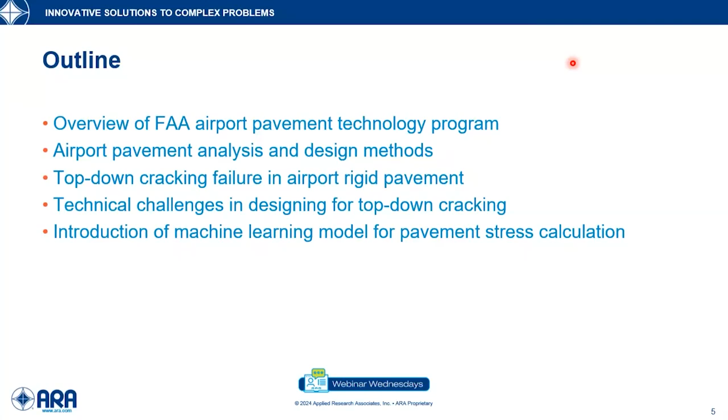Again, I'm Ali Ashtiani, and I'm excited to share insight on key advancements and challenges in airport pavement analysis and design. This webinar provides a quick overview of the FAA Airport Pavement Technology Program. Then it will explore airport pavement analysis and design methods with the focus on top-down cracking failure in airport rigid pavements. It will then discuss technical challenges in designing pavement for top-down cracking, and finally introduce a machine learning model for rapid estimation of pavement stresses.

So starting with the overview of the airport pavement R&D, since 1999, FAA has conducted state-of-the-art research on airport pavements at the William J. Hughes Technical Center in Atlantic City, New Jersey. National Airport Pavement Test Facility, NAPTF, is a full-scale pavement test facility within the FAA Tech Center that provides high quality, accelerated test data from pavements subjected to simulated aircraft traffic.

Since 1999, 9 construction cycles have been built and tested that includes both rigid and flexible pavements. In September 2015, FAA expanded its full-scale accelerated testing capabilities with the addition of National Airport Pavement and Materials Research Center, NAPMRC, with a focus on pavement material performance. We at ARA have provided pavement consulting support to the FAA since 2015.

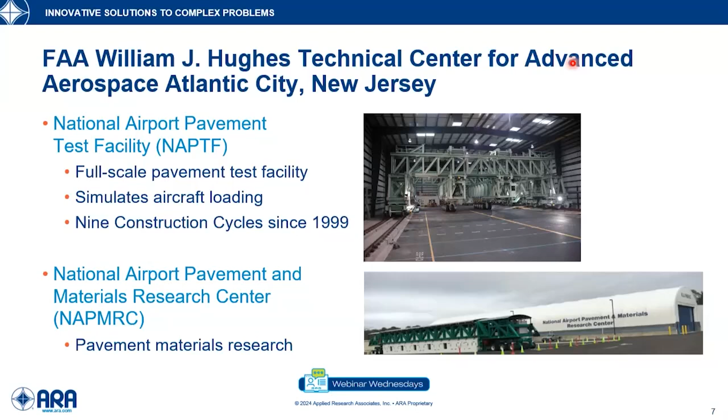The FAA Airport Pavement R&D program conducts research in areas of pavement design, pavement materials, and pavement evaluation, with the goals of designing safe, durable, economical, and environmentally friendly pavements. The products of this research are sets of specifications in FAA advisory circulars, specifications for material characterization, and a series of software packages for pavement design, evaluation, or management.

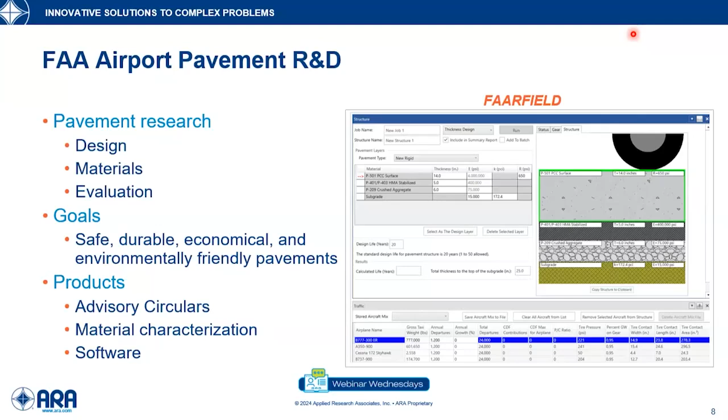So as an example, FAARFIELD is the FAA pavement design program where we have played a key role in its development, enhancement, and upgrades. So how does the airport pavement design work? Pavement design is based on a mechanistic empirical concept as shown in the diagram below.

It usually starts with defining a performance or failure criteria, which in our example, the airport rigid pavement, the failure criteria are typically bottom-up cracking and top-down cracking. So the procedure then uses a pavement mechanistic response model to calculate critical stresses associated with each of the failure criteria for a given pavement structure and an aircraft mix.

The calculated stress gets sent to a failure model that relates the repetition of that calculated stress to failure. The failure criteria are defined based on pavement distress quantity. So this part is the empirical aspect of the design procedure, and FAA uses data from NAPTF full-scale tests to establish the failure models.

Next step is to calculate the damage index, which is defined as the actual repetition of the aircraft to the repetition of failure. Then the damage is calculated across the pavement and for all the aircraft using a cumulative damage factor, or CDF, procedure. If this condition of the CDF is satisfied, the design is complete.

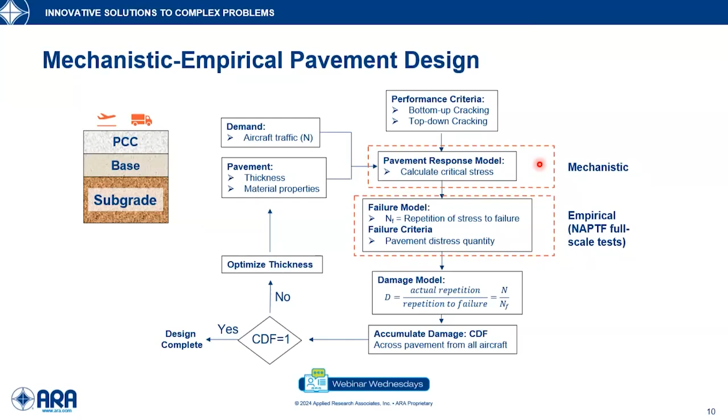The mechanistic models used in rigid pavement design programs typically include models based on layered elastic theory. These models are fast, but not too accurate for rigid pavements. The other method is closed form solutions like Westergaard's method. This is again fast, but it can accommodate very limited loading scenarios.

The gold standard method for calculating stress is finite element, which is the most accurate, but it's computationally intensive, so direct use is typically not practical for pavement design. The alternative is machine learning models, which have gained popularity in recent years. They're basically surrogate models trained based on finite elements, typically fast and with comparable accuracy to finite element methods.

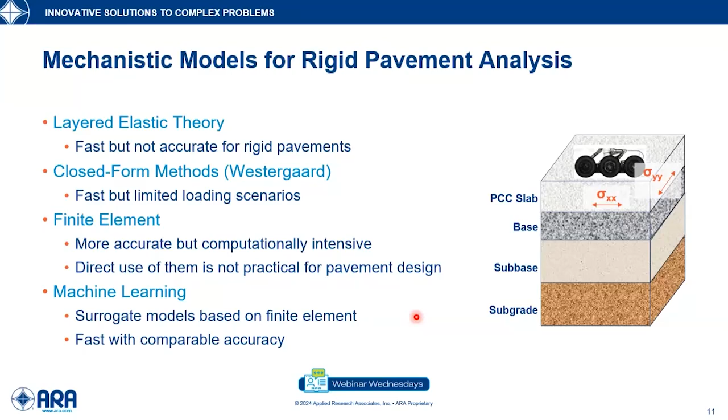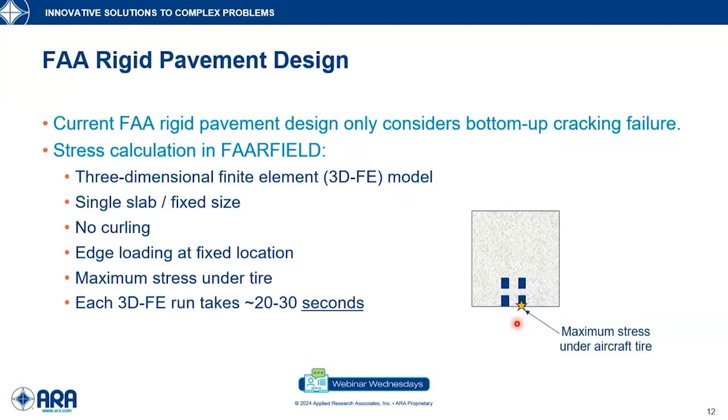The current FAA rigid pavement design only considers bottom-up cracking failure. The stress calculation in the FAARFIELD program is based on a three-dimensional finite element model. FAARFIELD uses a quite simple model: a single slab with a fixed size, not considering any thermal curling. The aircraft load is applied at the edges of the slab, at a fixed location, and the program calculates the maximum stress under the tires. Each run of the 3D finite element takes around 20 to 30 seconds.

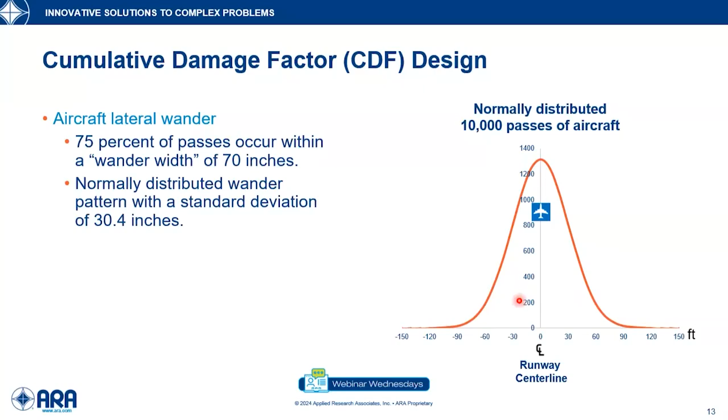As discussed earlier, pavement design uses the concept of cumulative damage factor, or CDF. A key aspect of CDF design is to account for aircraft lateral wander. Unlike highways where traffic is mostly channelized, aircraft rarely travel in a straight path along the pavement section in runways and taxiways. Instead, their movement includes lateral deviations known as aircraft wander. FAA accounts for this by assuming aircraft wander follows a normal distribution with a standard deviation of 30.4 inches. For example, if you have 10,000 passes of aircraft in your design mix, FAARFIELD distributes the passes across the pavement width, or runway width, using the graph shown here.

The CDF procedure for bottom-up cracking first calculates the stress for each aircraft, then feeds the stresses to a failure model to calculate number of passes to failure, or NF. It then normally distributes aircraft passes across the pavement, calculates the CDF term for all aircraft and across all lateral offsets, and combines all the CDF from all aircraft, as shown in this example.

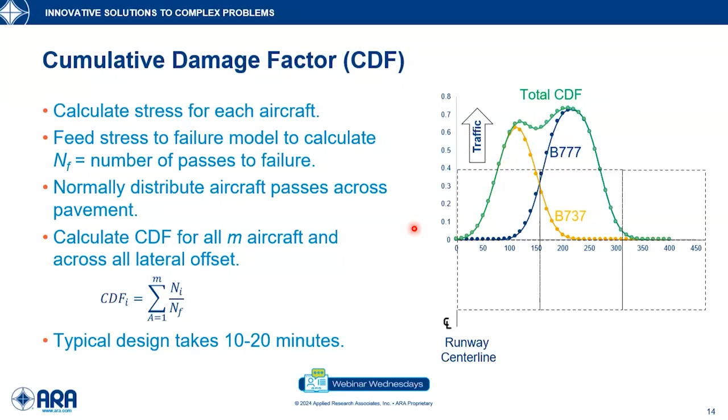A typical design process takes around 10 to 20 minutes, depending on the number of aircraft in the mix and the pavement layers.

FAA has a goal to add top-down cracking failure to the FAARFIELD program and to the rigid pavement design process too. Top-down cracking is caused by high tensile stresses on top of the slab and is likely to govern the failure when an upward curled slab is loaded with a gear load near its edges. Top-down cracking typically manifests as corner cracking or transverse longitudinal cracking.

So how does top-down differ from bottom-up cracking? These two stress contour maps try to explain how they are different. Assume a pavement layer system with jointed slabs, subjected to a negative temperature gradient, meaning they're curved upward, and loaded with an aircraft gear near one of the corners. Unlike bottom-up cracking, where the maximum bottom stress occurs just below the tire footprint, the maximum top stress occurs far outside the tire footprint, as shown in this dark red area.

The critical top stress can be critical in both directions, looking at the stress, the Y and X components can both be critical. The next difference is that the magnitude and location of the maximum top stress highly depends on the location of the applied gear with respect to the edges. As you move the gear toward the center of the slab, the chance of top-down cracking becomes minimal. But if you load near the edges or corners, there's a high chance of top-down cracking.

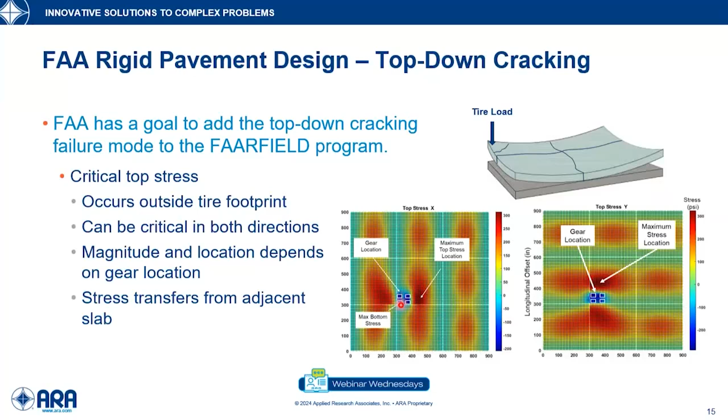Finally, the top stress can transfer from one loaded slab to an unloaded slab. Given all these characteristics of top-down cracking, the mechanistic modeling requires the inclusion of thermal curling and the use of a multiple slab system, as opposed to the single slab system used for bottom-up cracking. This multiple slab system accommodates the full landing gear, which is critical in top-down cracking, accommodates aircraft lateral movement, and considers load transfer between adjacent slabs.

A 3D finite element run for these complex slab configurations can take up to 30 minutes, almost 50 to 60 times higher than the typical run for bottom-up cracking.

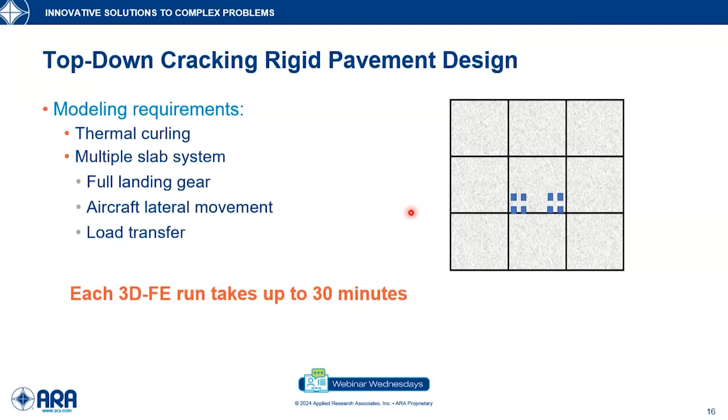For top-down cracking design, the existing CDF for bottom-up cracking cannot be directly used. The CDF for top-down cracking requires calculating the critical stress for each point of the slab, for every landing gear position, and for each aircraft. The stress must be calculated in both directions, transverse and longitudinal. This implies that the new procedure must provide more than just a single largest stress in the slab.

It must provide the stress distribution across the slab for any lateral position of the aircraft, as shown in this example. This is the pavement system loaded with this gear at this corner. We are looking to calculate the stress distribution along these pavement edges to be able to accurately calculate the CDF. So what's the challenge here?

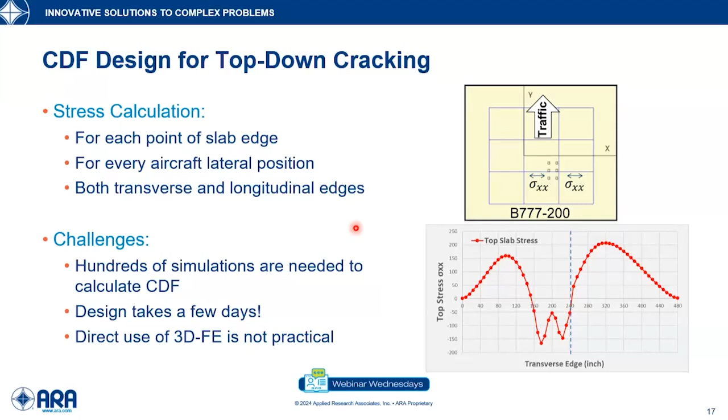To complete a CDF procedure for top-down cracking, we need to perform hundreds of finite element simulations. The design can take a few days for a single design. This indicates that the direct use of 3D finite element analysis is not practical for top-down cracking design.

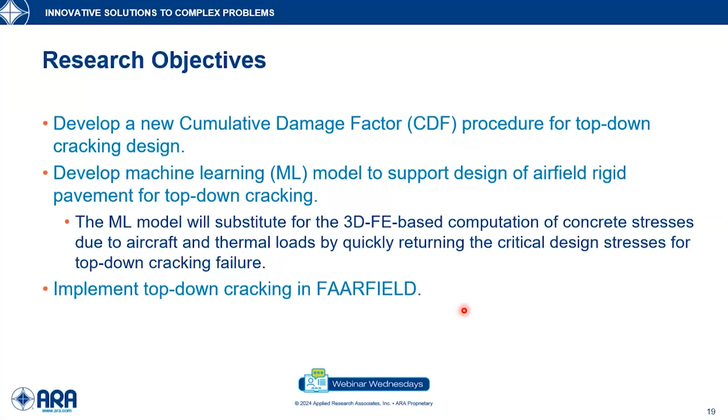To address these limitations, FAA initiated research with the objective first to develop a CDF procedure for top-down cracking, then to develop a machine learning model that can support the design of top-down cracking. The machine learning model will substitute the 3D finite element analysis for computation of critical stresses. Finally, the goal is to implement top-down cracking in the FAARFIELD program.

Based on these requirements, we developed a machine learning model that takes input parameters and estimates the stress distribution along the slab edges for a pass of the aircraft.

Our model consists of a total of 19 parameters, which include the pavement properties, including layer modulus and thickness, joint spacing and joint stiffness, thermal loads including temperature gradients and coefficient of thermal expansion, and the gear configuration, which includes gear type, gear weight, tire pressure, dual spacing, tandem spacing, and track spacing.

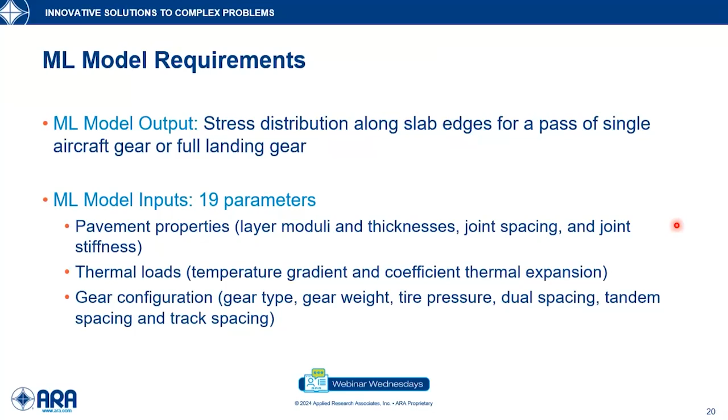For these models, we consider three pavement systems. The first is the 4-layer pavement system typically used in large and medium hub airports, consisting of a PCC slab on top of a stabilized base, sub-base, and subgrade. These pavements can serve heavy aircraft with gross weight greater than 100,000 pounds, with gear types including dual tandem and dual tridem gears.

The second pavement system is a 3-layer system typically used as a rehabilitation alternative in large hub commercial service airports, basically by eliminating the stabilized base and using a thicker PCC slab. This pavement system can serve heavy aircraft like the 4-layer system.

Finally, the third pavement system is a 3-layer system with a thinner pavement, used in general aviation airports. This pavement can serve lighter aircraft with gross weight less than 120,000 pounds, with aircraft gear that is single or dual.

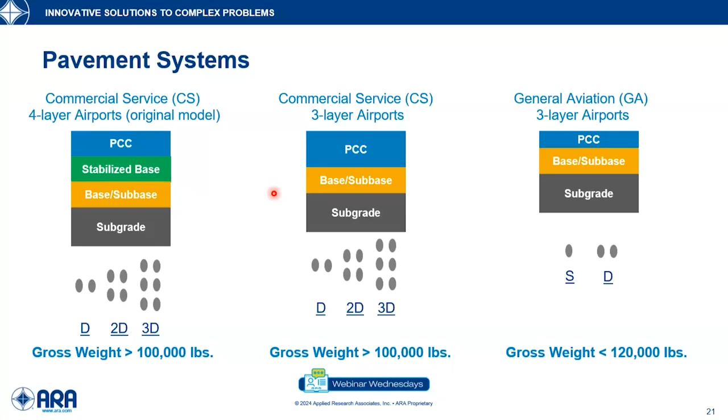To train the machine learning model, we developed a comprehensive database by performing 3D finite element simulations using the FAA rigid pavement design program, FAARFIELD. We used distinct combinations of pavement and aircraft inputs to calculate the resulting stress distribution, sigma xx and sigma yy, along the edges of the design slab, which is the center slab in a 3x3 slab system. We used 5-inch elements for all cases to ensure the accuracy of the model.

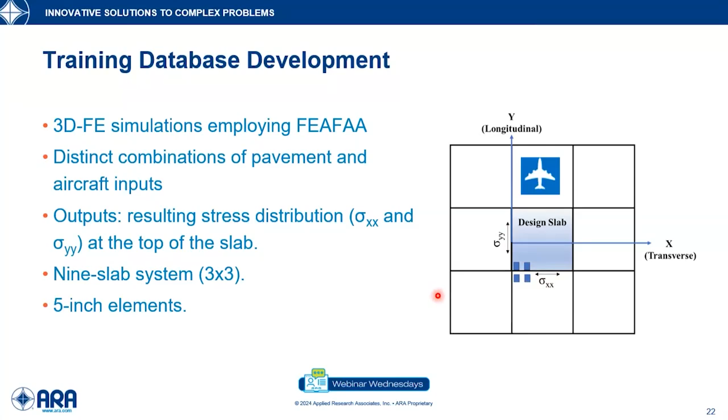We used a Monte Carlo simulation that randomly chose input values from predefined ranges with a uniform probability distribution for each simulation. In total, we created 127,000 records for the 4-layer system, 125,000 cases for the 3-layer commercial service airports, and 125,000 cases for the 3-layer general aviation airports.

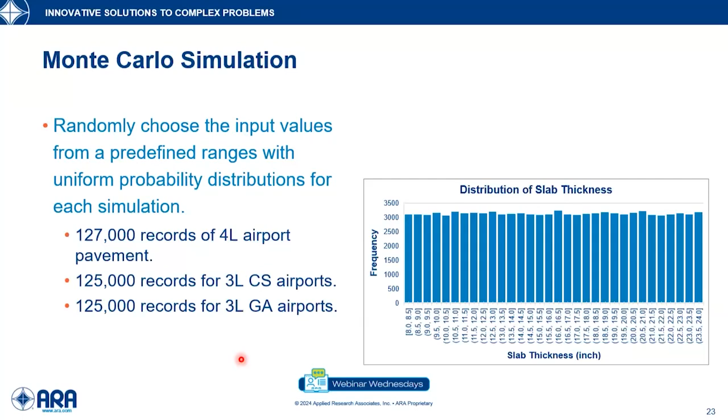For each input parameter, we defined a range of minimum and maximum based on FAA standard material properties and the FAARFIELD material library. We used that as a benchmark, then extended those limits to include a wider range of pavement cases.

For example, FAARFIELD uses a fixed PCC modulus of 4 million PSI for design, but we considered PCC modulus ranging from 3.5 million to 6 million PSI to account for high strength concrete. For the temperature gradient, we used a range between -3 and 0, assuming that positive temperature gradient had no effect on top-down cracking.

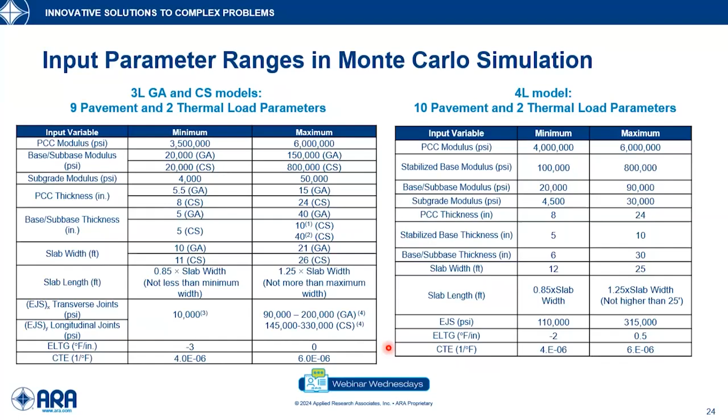We used 4 parameters to encode a single aircraft gear, which includes the gear weight, tire pressure, dual spacing, and tandem spacing. For each parameter, we define a min and max based on the FAARFIELD aircraft library, and we expanded those limits to accommodate any gear configuration, including any that come in the future.

The gear parameters are independently selected in the Monte Carlo simulation, so they do not necessarily represent a real aircraft. This approach increased the robustness and generalization of the model, and basically eliminates the need for retraining the model every time a new aircraft gear configuration releases. So our model is not aircraft specific, but instead a general model that can handle any gear configuration.

The single gear case was used to calculate the stress distribution along the x-axis and y in transverse and longitudinal direction.

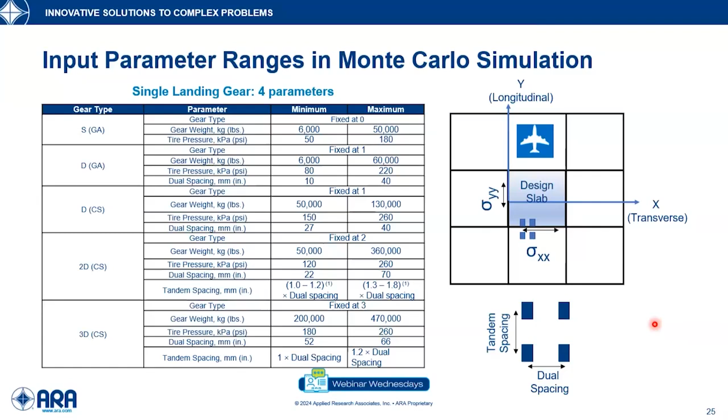We also considered the full landing gear cases, like 2 belly gears of Airbus A380 or 2 belly gears of Boeing 747, because the full landing gear, if applied at the same slab, can significantly increase the chance of top-down cracking. So we wanted to make sure that we account for that.

We have one additional parameter for the full landing gear, which is the track spacing, the spacing between the two gears. These full landing gears were used to calculate the stresses in the X direction only, and the single gear was used for the stress in the Y direction, because the full landing gear has no real effect on the stress in Y direction. Its effect is mostly on the X direction stress.

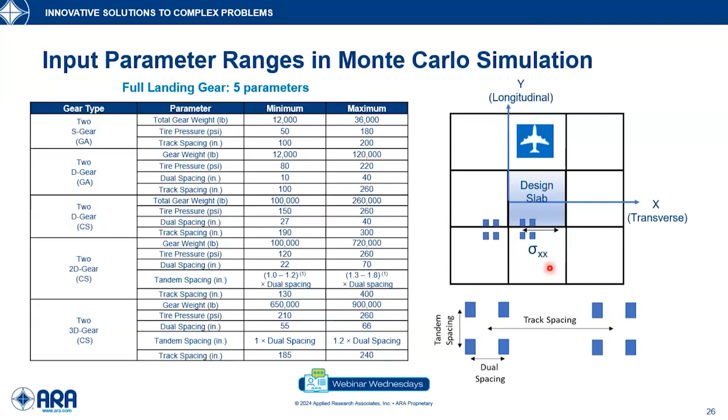Another parameter that we considered in our model was the aircraft lateral position, or gear lateral position, which we show has a significant effect on the magnitude of the stresses for top-down cracking.

The gear can vary from the third of the adjacent slab to the middle of the design slab. This is for the single gear, and for the full landing gear, the gear can vary from here to there, and this location was randomly selected in our Monte Carlo simulation.

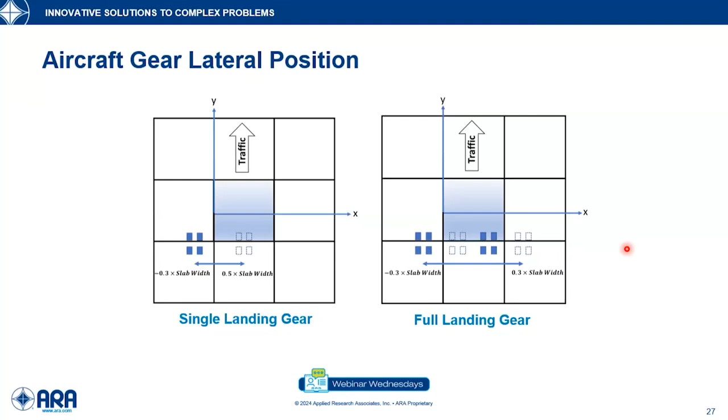Another aspect we considered was how the stress state on pavement changes as a result of aircraft rolling along the pavement. So do we need to simulate aircraft longitudinal movement like we did for the lateral movement? The answer is no. An analysis showed that the maximum top stress in the slab occurred when an aircraft actually enters the slab, as shown in these locations.

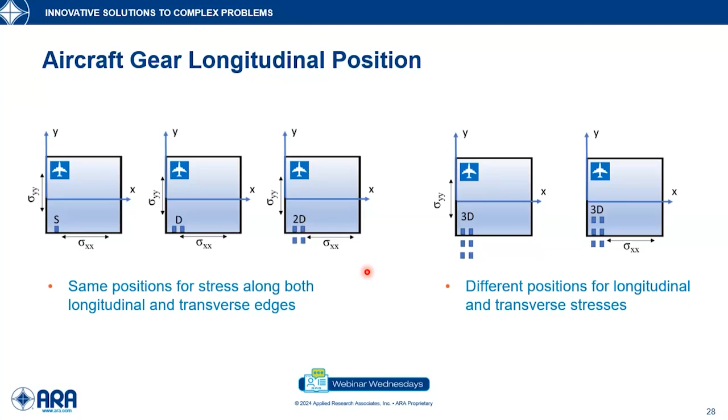When the aircraft enters the slab, it causes the maximum top stress, so we don't need to really model the whole aircraft movement along the pavement. The aircraft longitudinal position was not considered as an input variable in the machine learning model. Instead, their locations were fixed as shown here in these positions in the finite element simulations.

Using the developed database, we trained a machine learning model that can estimate the stress distribution along the slab for any gear configuration, for the predefined ranges of the input parameters. The model is a modular deep neural network, a deep artificial neural network.

As I said, we had different pavement systems, and we determined that the underlying physics from the 3-layer and 4-layer systems are all the same. So we decided to combine the database from the 4-layer and 3-layer systems to create a comprehensive database and developed a general pavement stress distribution model by leveraging transfer learning.

The machine learning model has two major modules: one is the input encoding, and the other is the pavement stress distribution prediction module. The input encoding takes all the input parameters, like pavement and gear parameters, and processes them into latent features, which are the compressed form of data. The latent feature gets sent to the pavement stress distribution prediction model to predict the stresses.

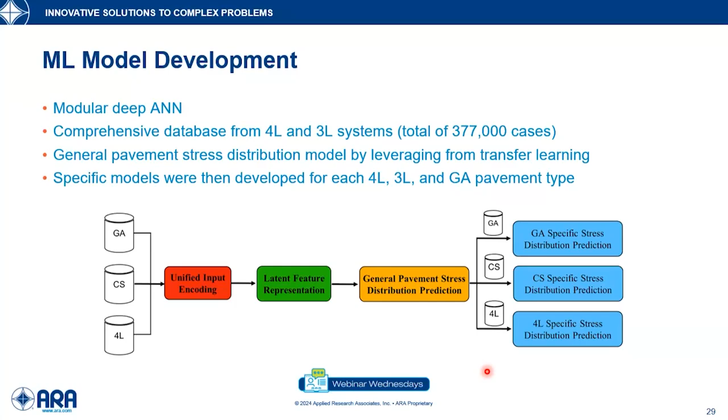We first developed the general pavement stress distribution model, and from that we developed specific models for each of the 4-layer, 3-layer, and general aviation airports.

This diagram shows the architecture of the input encoding module, which has a single architecture with a shared interface that can handle all gear types.

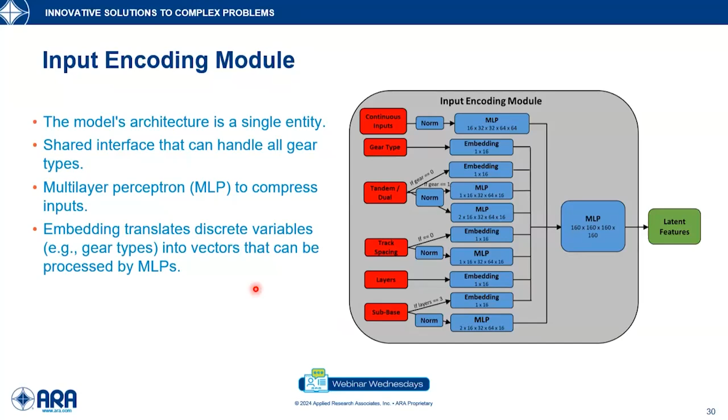We used multi-layer perceptron to process the continuous input variables like the pavement thickness and modulus, and we used embedding to translate the discrete variables like the gear type into vectors that can be processed by the MLPs. The output of this input encoding module is the latent features.

The stress prediction modules take the latent features as input and estimate the stress in X and Y direction in two separate paths.

For the stress prediction, we initially used conventional deep learning regression models for discrete prediction, where the predictions are made over a domain with a fixed number of outputs. We use a kernel function to approximate the shape of the stress distribution.

However, since the output of the training cases were not the same size, because we had different slab sizes in the finite element database, we had to interpolate the nodal stresses to a fixed number of points. This was a constraint that significantly reduced the accuracy of our model.

So instead, we developed a novel ANN model that predicts a dynamic functional for continuous waveform prediction. In this approach, there's no need for the model to specify a fixed range over the prediction domain. The displacement in this figure is an abstract distance value across the stress waveform, which has a dynamic size.

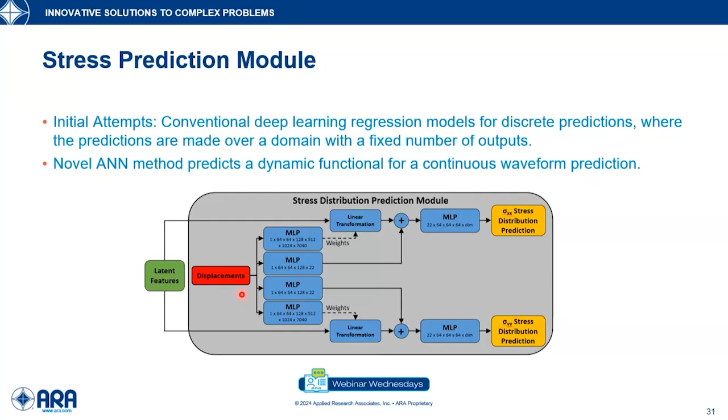For model training, we used backpropagation and an adaptive Hessian numerical optimization algorithm, which is a fast second-order stochastic optimization algorithm designed for machine learning. We used multi-task learning of the cost function, which the model tries to minimize during training, with two objectives: one, to minimize the error near the peak stress area, which is critical for pavement design; and second, to minimize the mean square error of the entire stress distribution waveform, to encourage the model to learn a more generalized representation of the underlying physics.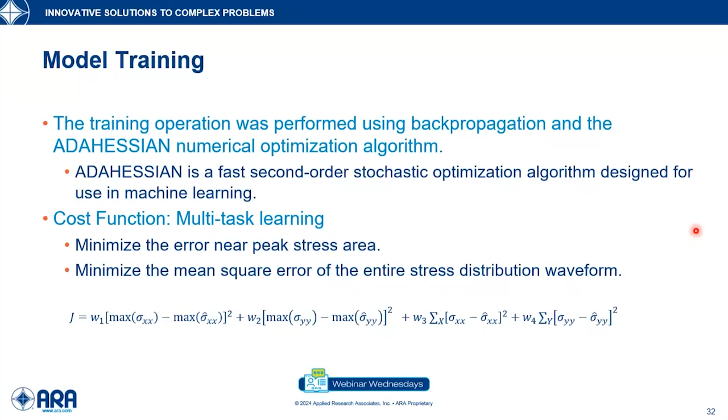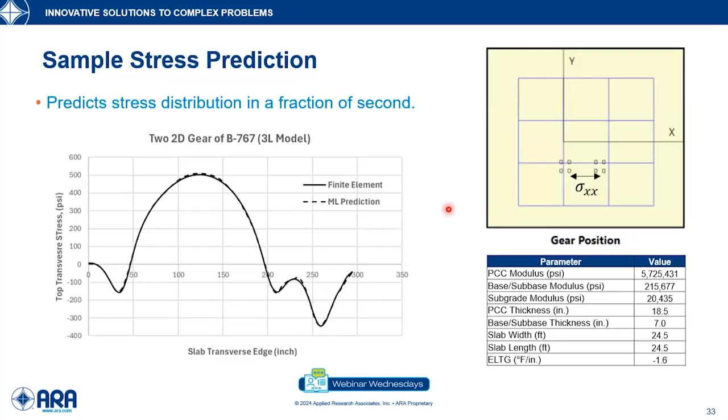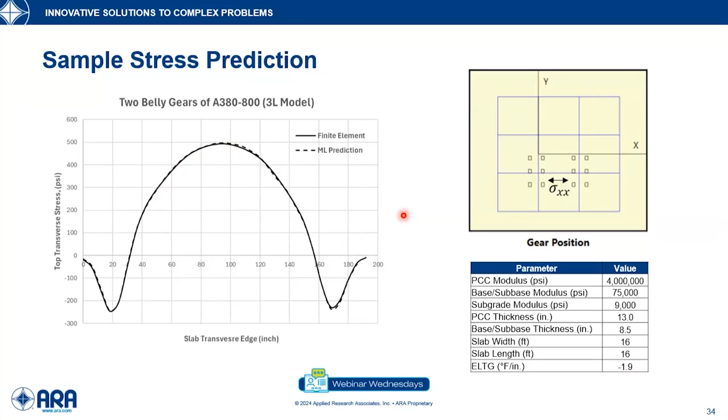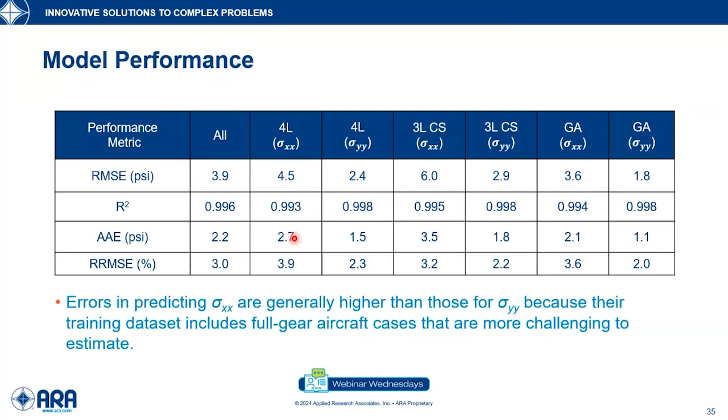Another observation is that the error for the prediction of stress in the X direction is typically higher than in the Y direction, because the database included full gear aircraft, full landing gear cases, which are more challenging to estimate. You can see that R squared scores are all above 0.99.

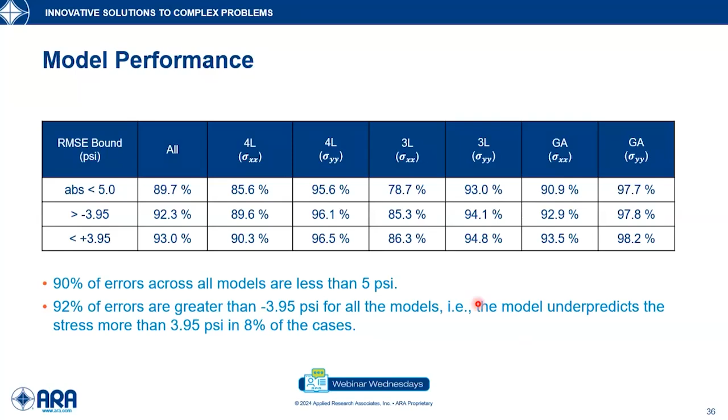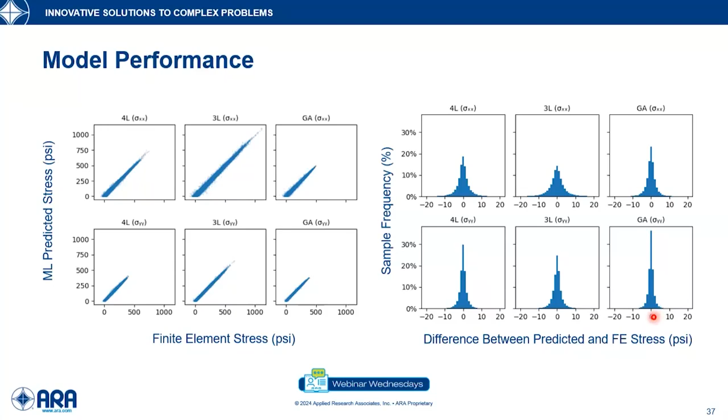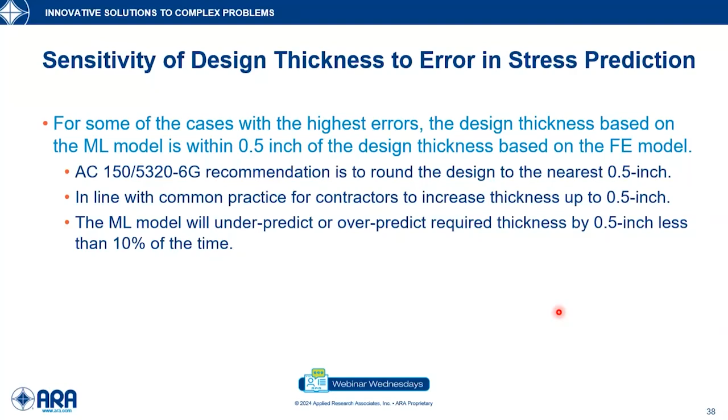We consider this an acceptable error because it aligns with the recommendation in the FAA advisory circular to round the design thickness to the nearest 0.5 inches, and also in line with common practice for contractors to increase the thickness by up to 0.5 inches. Overall, the machine learning model will underpredict the thickness by more than 0.5 inches in less than 10% of the time. So for 90% of the time, the difference in final thickness is less than 0.5 inches.

The machine learning models were developed using the PyTorch machine learning framework, and then we compile the models into a compatible DLL that's suitable for use in FAARFIELD program. The deployment goal is to integrate the ML model into FAARFIELD as a drop-in replacement for 3D finite element simulation to be used in the airport rigid pavement design process.

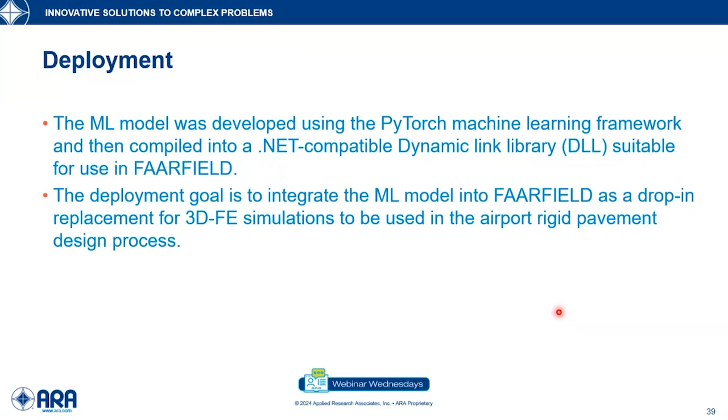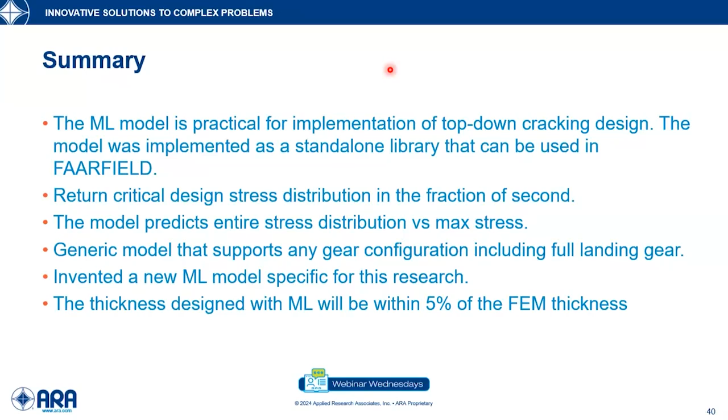We published one report for the initial research, which included the 4-layer system, and we're publishing another report that includes the model for all pavement systems. It should be out very soon. So if you're interested to learn more about this research, you can read these reports.

Finally, I want to thank the contribution of our ARA team: Aaron Williams, Dr. Tim Parsons, and Dr. Adam Amos-Binks. Specific thanks to the FAA, Dr. David Brill, the program manager who initiated this research and supported it, providing very valuable feedback. Mr. James Layton, branch manager at the FAA Tech Center, and Mr. Murphy Flynn, the airport pavement section manager.

Thank you all for listening. I'll be happy to take questions.

Ali, thank you very much. That was really great work that you and your team have done, and I was very happy to see the great results that you produced under your research.